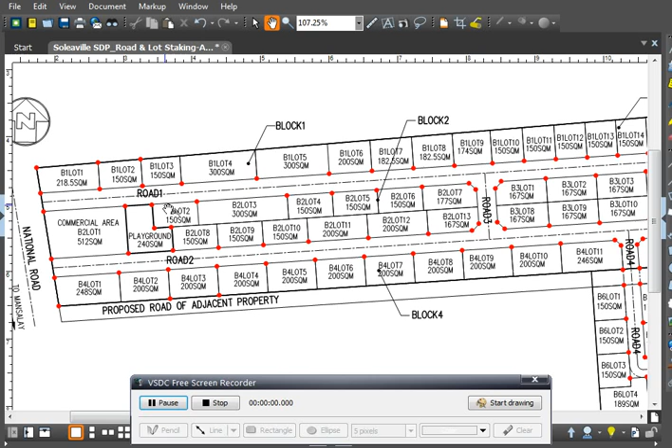Good morning. I made this video instruction for additional information regarding the road staking we're going to do. Basically, the purpose of this is to accurately identify the limit of the road, the two lots, and the playground, so we can know their exact limits.

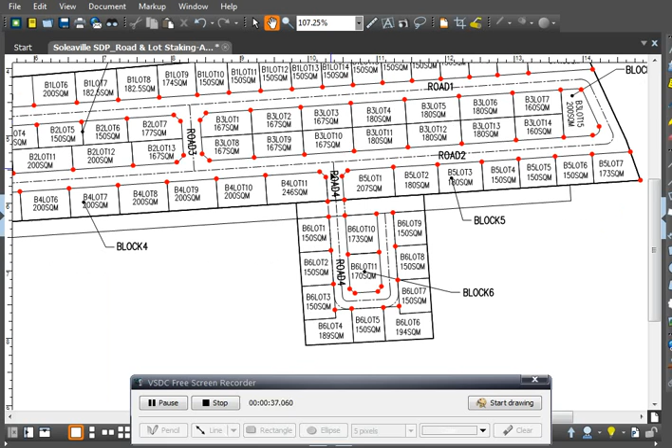So for Road 1, 2, and 3, it is 7 meters wide. And then this Road 4, which curves around, is only 6 meters wide.

These red dots are my suggested location for the stakes. If you notice, it falls on the corner of the lot along the road.

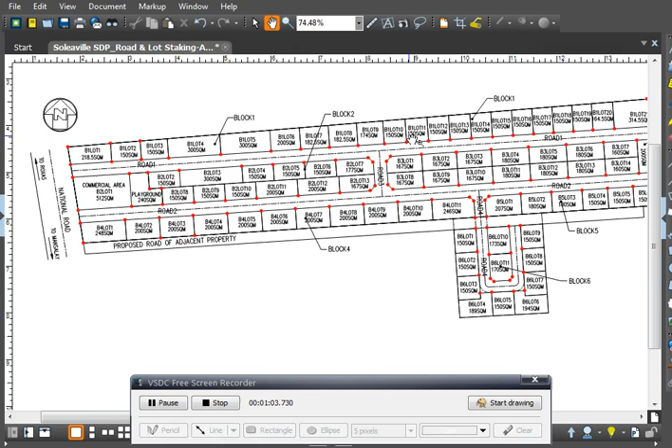Instead of putting the stakes randomly along the road, it's better to place them at the corners of the lots, since the distance between them is already quite far, ranging from 10 to 15 meters. So it's like hitting two birds with one stone, we identify the road limit, and we also identify the corner of the lots.

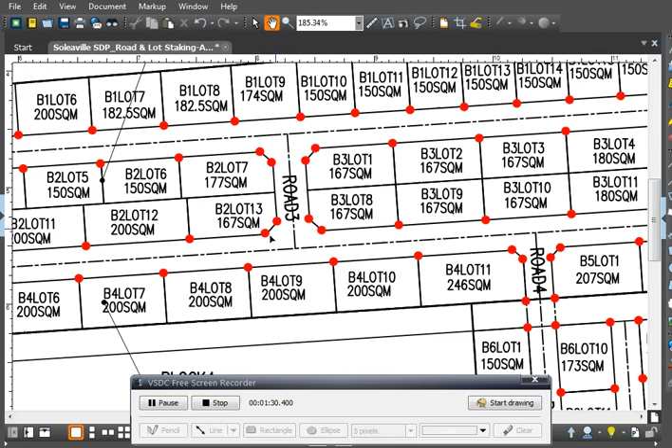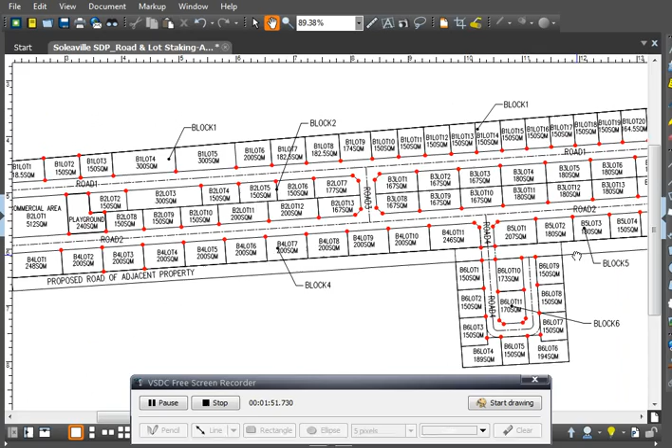There's also a similar situation at the back, and then here at Road 4, at the intersection with Road 2. But other than that, this should be very, very straightforward.

Also, we need to identify the corners of the playground, and then the corners of B1 Lot 2 and B4 Lot 3.

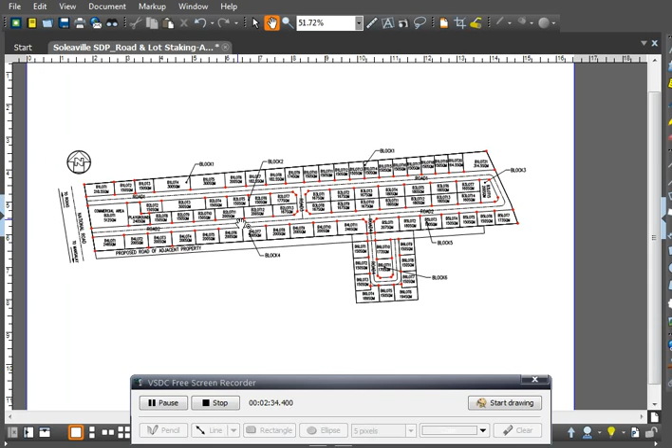I will also send you the AutoCAD file for your reference. Basically, what I changed in the AutoCAD file is the limit of the playground, which used to be part of the commercial area. So I divided the commercial area to place the playground at the back.